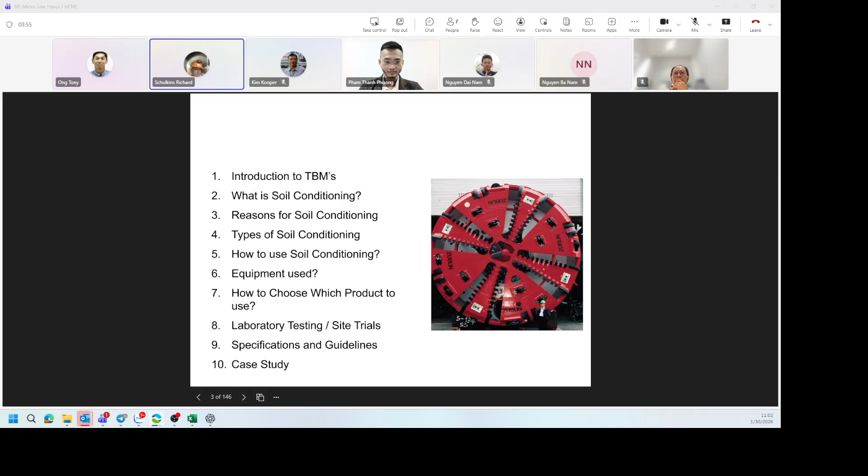From your emails, I hope this doesn't sound insulting, it's not meant to, but it sounded like you didn't really have a very good idea of the difference between EPB and slurry machines. I just know a little bit, but I'd like to hear more. I know that in Vietnam there's only ever been EPBs to my knowledge, I've never known any slurry machines. There may have been slurry machines used for pipe jacking, but I'm not aware of them.

So there are lots of different types of tunnel boring machines. Earth pressure balance machines, everyone calls them EPBMs. You've got open face machines where the front isn't pressurized at all. And you've got slurry machines where you use a bentonite slurry to create pressure on the front of the machine.

Excuse me, Mr. Schulkins, I just want to— Certainly, your presentation. Don't call me Mr. Schulkins, don't call me Mr. Schulkins, just call me Richard. Drop the Mister, I'm not that formal.

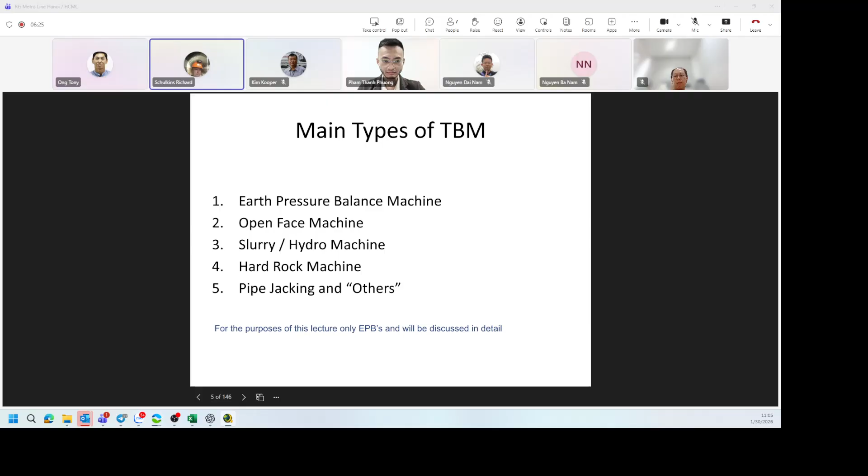Hard rock machines, where you can either have hard rock machines with no face pressure, or hard rock machines that have face pressure. And the truth is, with all of these machines, you have combinations you can make as well. So even though I've listed 5 types of TBMs there, you can mix and match between all 5 of those to make different kinds of tunnel boring machines, but that's basically it for now.

Tell me, what do you see? Do you see just a small frame, or a big picture? Because I pushed a button and it makes it seem quite small. Do you see this presentation on a big screen or not? I'm seeing the big screen. A brief introduction to EPB machines. Oh, you see a big screen, okay, only the words, no picture, no photos, okay.

Can you see a video that I just put up? Can you see the video? No, I'm just seeing a short video. Okay, stop, only that. Oh, it's ended. You have to be patient with me, sorry.

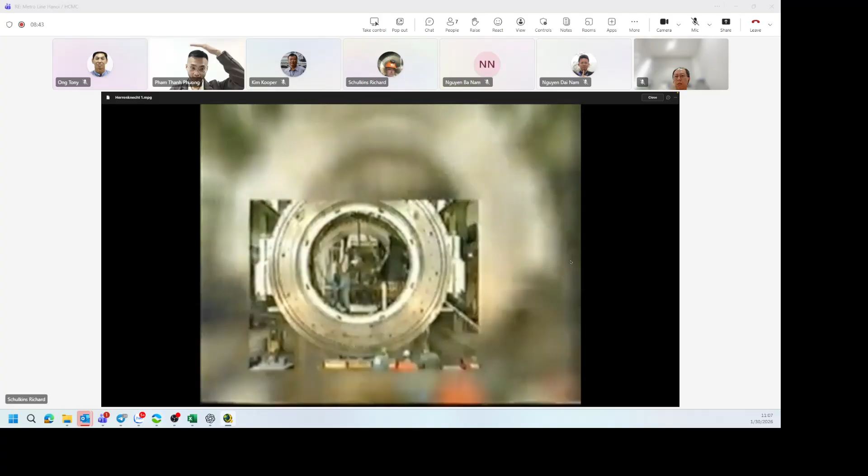Herrenknecht AG specializes in highly complex tunneling projects made to customer specification. Therefore, the machine is specifically designed and manufactured to cope with the prevailing geological and hydrological conditions. This ensures maximum efficiency, environmental compatibility, and safety when the tunneling project is on its way.

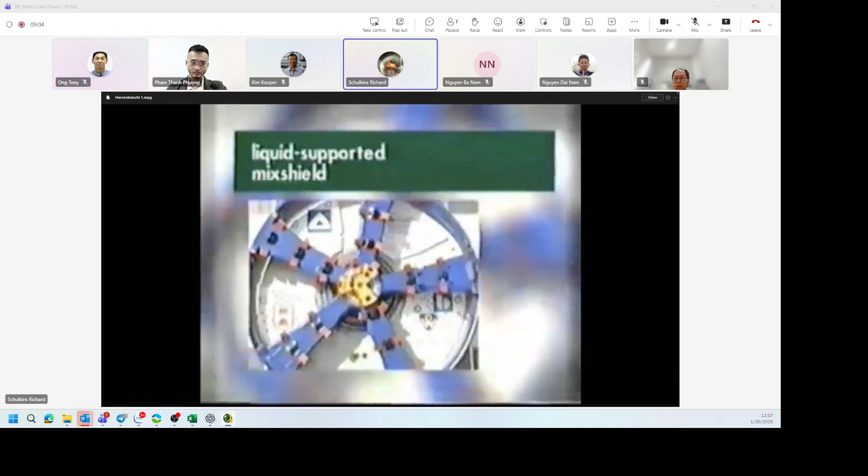Our film shows the structure of two of the most important types of machines made by Herrenknecht AG and how they work. The liquid-supported Mixshield offers the best solution for successful tunneling in loose soils of all kinds and in heterogeneous geological conditions and cohesive formations. Even high groundwater levels can be safely handled using this method. The EPB shield is the first choice in homogeneous cohesive soils.

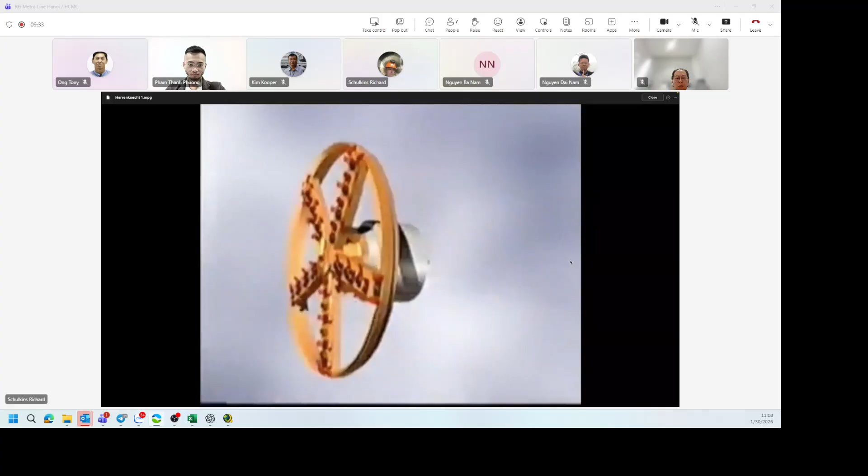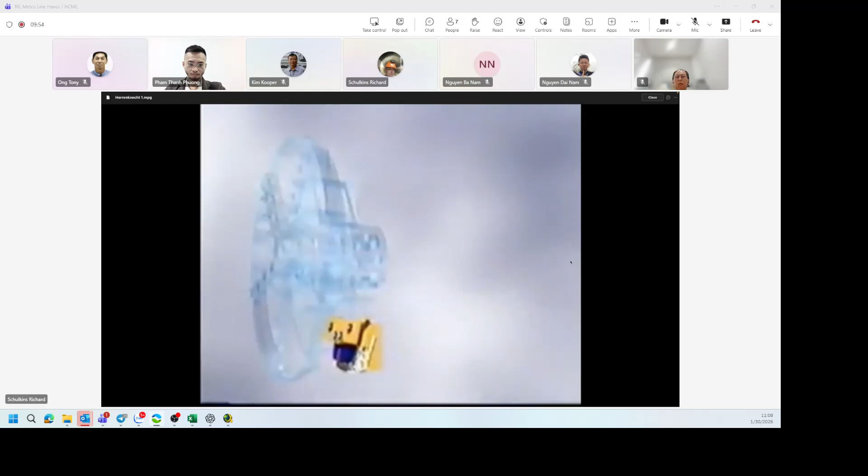The liquid-supported Mixshield, shown here, consists of a cutting wheel with a center-free ring drive and special tool arrangement, the excavation chamber, the submerged wall, open at the bottom, the pressure wall, and the face support plates. The stone crusher. The feed line for bentonite, the slurry line for soil bentonite mixture, and the compressed air line.

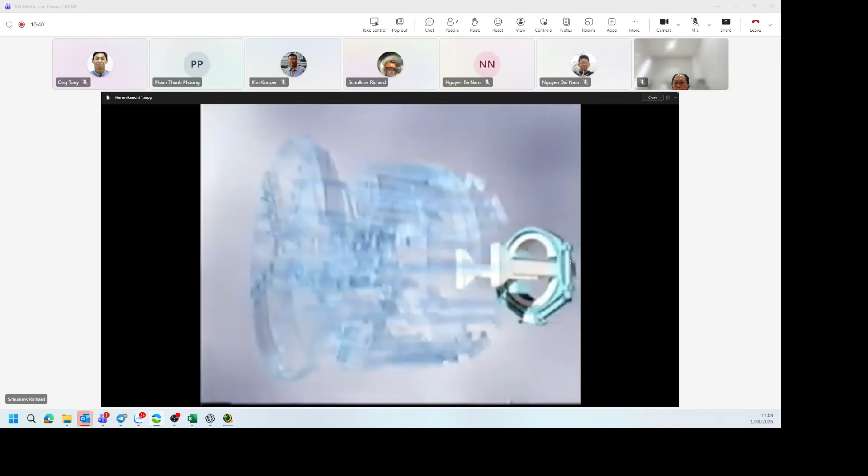The thrust cylinders to provide the thrust force, colored yellow, cylinders for the axial displacement of the cutting wheel for changing tools, colored green, as well as articulation cylinders for driving curves. Compressed air locks for access to the excavation chamber. And the erector for installing the segmental lining.

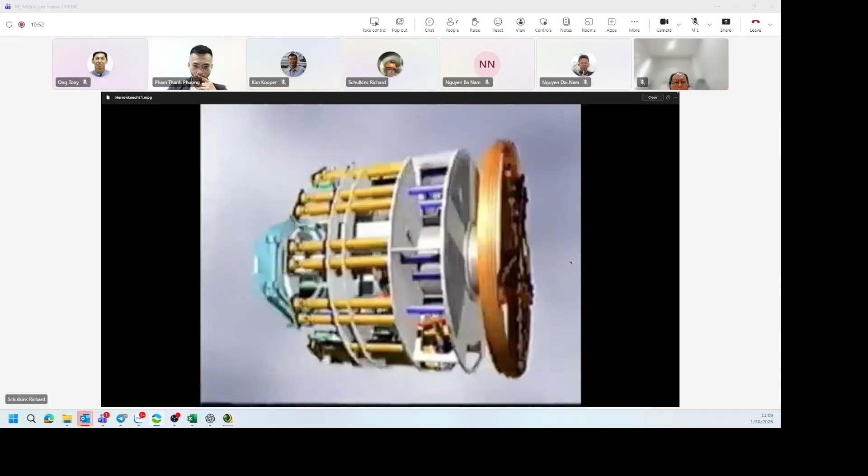All the jobs, from excavating the soil to installing the lining, are carried out under the protection of the shield.

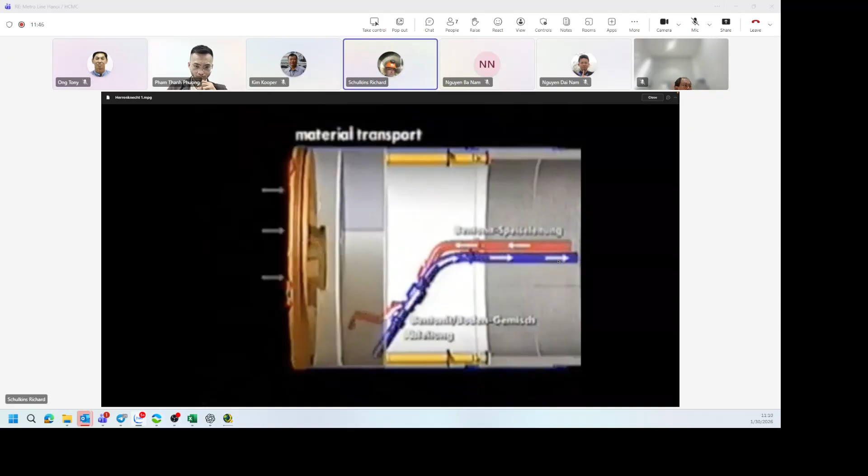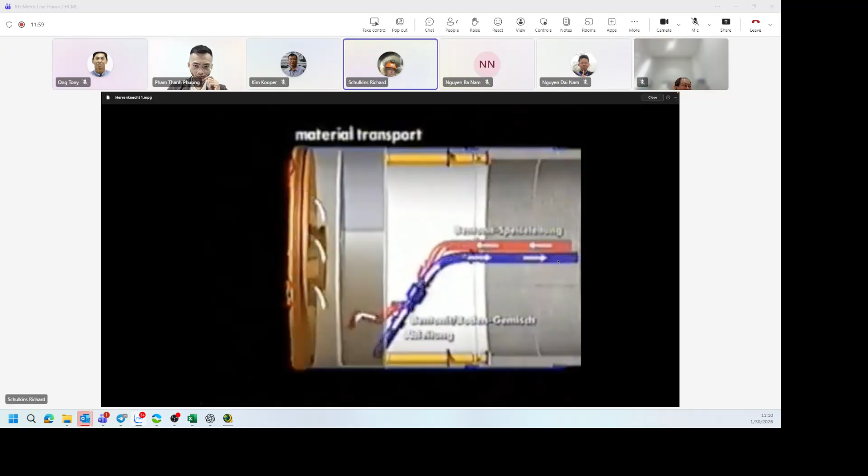In the case of the liquid-supported mix shield, a bentonite suspension acts as a supporting and transporting medium. The suspension is fed into the annulus behind the excavation chamber via a feed line. Here, a mixture of the bentonite suspension and the excavated soil is created, which is pumped into a separation plant via a slurry line. There, the bentonite is recovered and can be immediately pumped back to the excavation chamber.

The stability of the face is ensured by a filter cake placed ahead of it, formed by the bentonite suspension under slight overpressure. A compressed air chamber behind the submerged wall makes it possible to precisely regulate the pressure and thus guarantees the stability of the face even under difficult conditions.

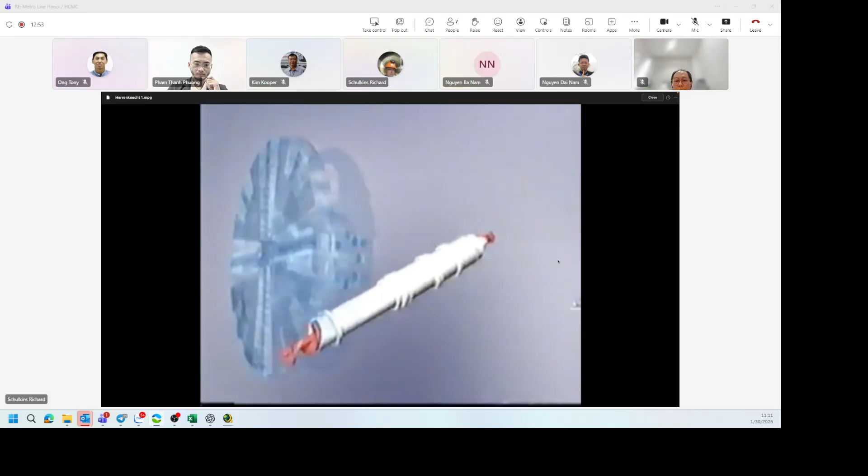An EPB shield consists of the widely closed cutting wheel with special tool arrangement and a center-free ring drive. A pressure wall with stators which form the excavation chamber together with the cutting wheel. A screw conveyor and a conveyor belt to transport muck.

Thrust cylinders and articulation cylinders for inclining the tail skin when driving curves. A compressed airlock. And the erector.

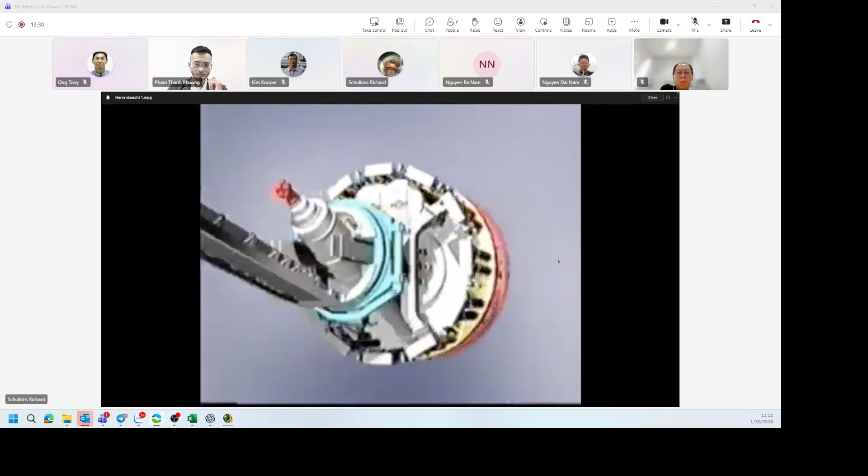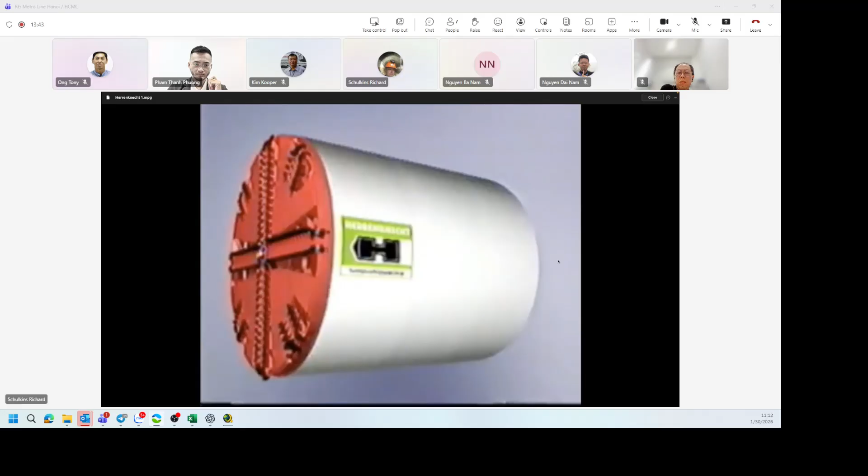In contrast to the bentonite shield, in the case of the EPB shield, the excavated soil itself acts as a supporting medium. To be able to fulfill this function, it must first be turned into a plastified consistency. Depending on the local conditions, this is done by the controlled injection of conditioning agents, such as foam. This makes it possible to reduce the drive torque and cut down wear at the same time. The foam is injected into the soil ahead, via nozzles installed on the cutting wheel.

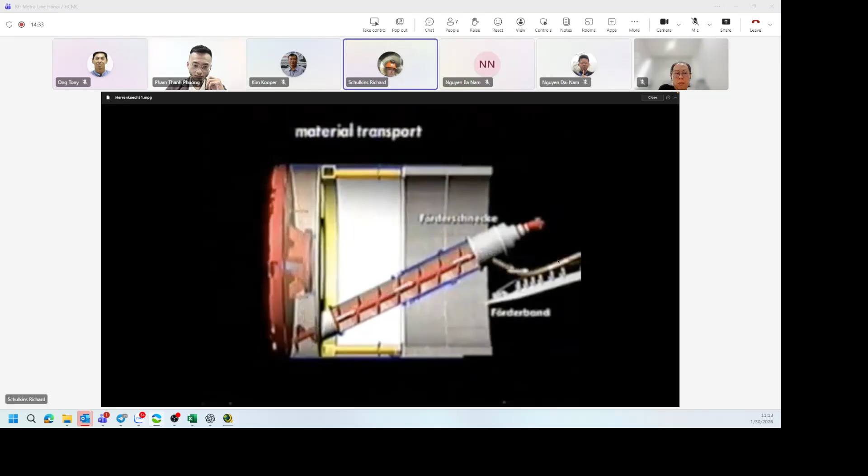Once the soil has been prepared in this way, it is no problem to transport it from the excavation chamber via a screw conveyor onto a conveyor belt. From here, it will be further transported via rail or lorry.

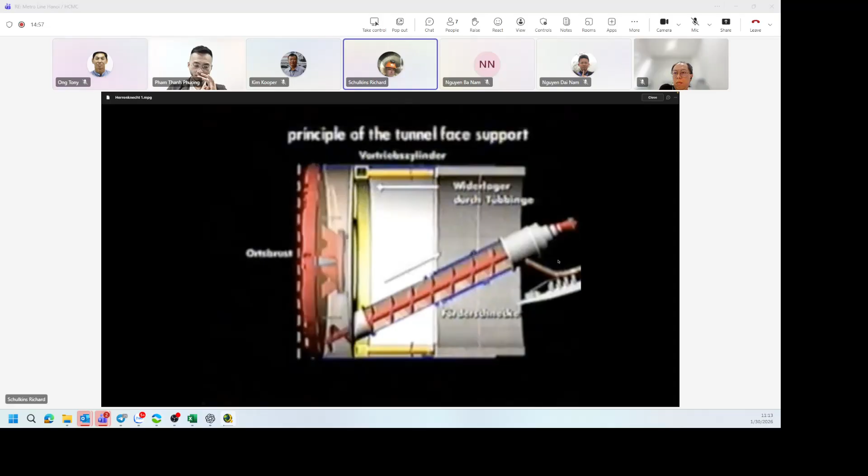In the case of the EPB shield, the pressure for supporting the face is controlled by the coordinated control of advancement speed and the screw speed. The excavation chamber will be filled to ensure adequate support of the face at all times and to be able to react correspondingly to pressures from the earth or groundwater.

Sorry, I'm having a little trouble.

Okay, so that's the basics of a slurry and EPB machine. Let's get back to the presentation.

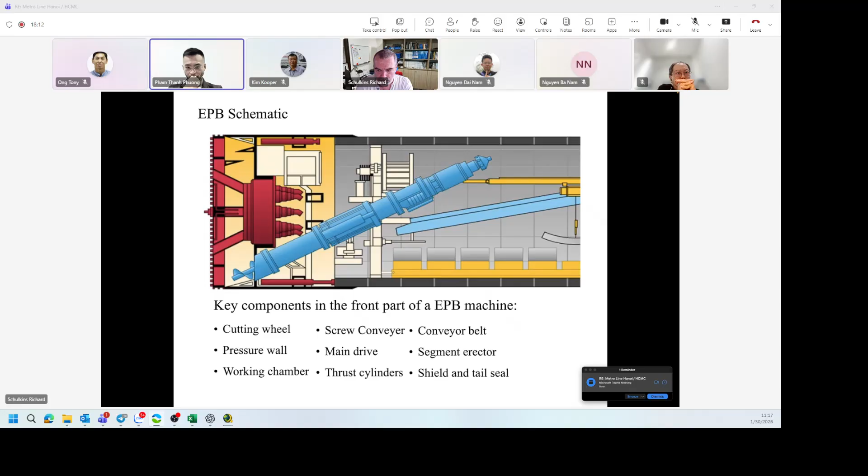Does that make sense? Yep. I know it does to you, Kooper. Oh no, it wasn't you who said that, sorry. Same.

So what you're trying to do is balance the pressure in the front of the machine. You've got hydrostatic or water pressure, and you've also got the weight of the soil. So if you're talking about the project you referenced, in Hanoi, where the stuff came up from the bottom to the surface.

So you've not just got hydrostatic water pressure, you've got earth pressure as well. So, how deep was that tunnel? What was the depth of it? We'll just make an assumption. Assume it was 30 meters deep.

30 meters. Normally the water table, I'd imagine in Vietnam, is quite high. So you've got 30 meters of water, which is 3 bars. You've also got soil pressure, the weight of the soil, so it might be more than 3 bars. The face pressure you need to employ is probably something like 3.5 to 4 bars.

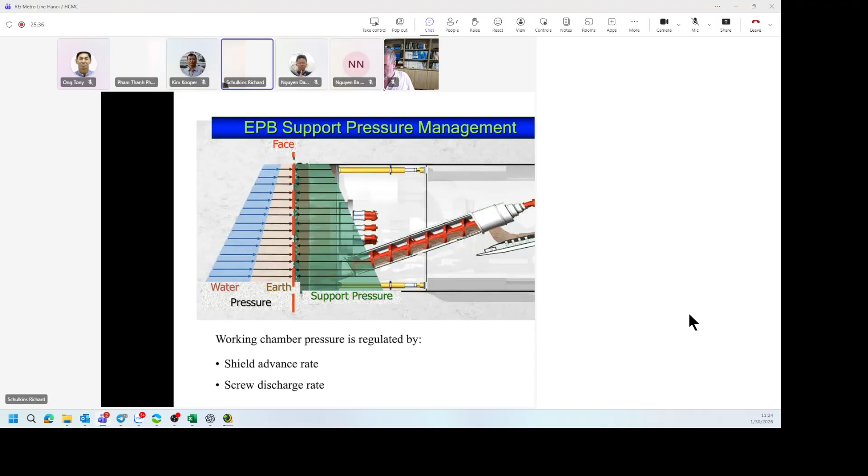Too much too soon, perhaps, but yes, sometimes they use bentonite or maintain face pressure, but we're only talking about a few buckets, not meters cubed of bentonite. Don't know if that makes sense, it's a tricky concept.

Forget about bentonite, we're only talking about EPBs. So when we're injecting foam or polymer into the front of the tunnel boring machine, into the cutter head face through the ports where the foam was blowing out on the video, you're trying to turn the soil from being dry and immovable into some kind of plastic material that's very movable.

Like that, you can create a paste at the bottom of the screw conveyor, and the screw conveyor can remove that paste easily. If it's dry soil, you're not able to remove it with a screw conveyor because it'll all hang up above the screw conveyor, it won't come out, it will just stick there. So you have to make the soil into a plastic movable mass. Does that make sense? Yep.

Cool. Same, different.

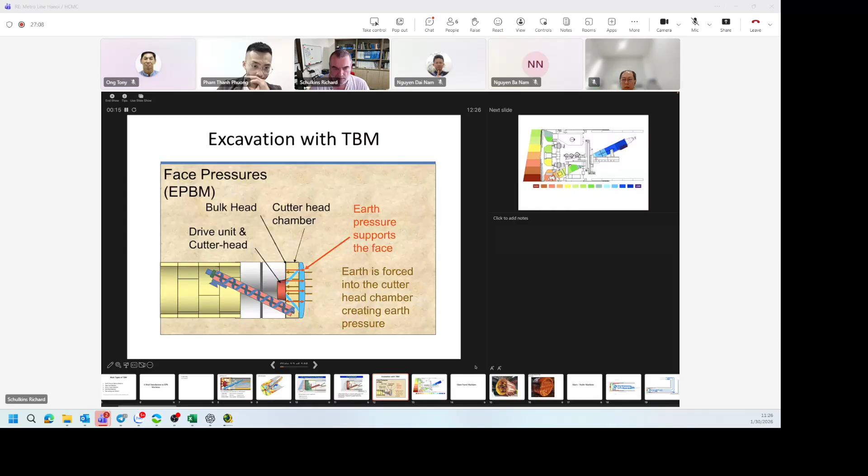The size of your tunnel boring machine is probably, you said, 5.5 meters internal. But when you're setting the face pressure, you have to remember that the pressure at the top of the TBM is going to be different to the pressure at the bottom of the tunnel boring machine. So when you consider your face pressure, typically you need to consider a face pressure that you'd experience a third down from the top of the tunnel boring machine.

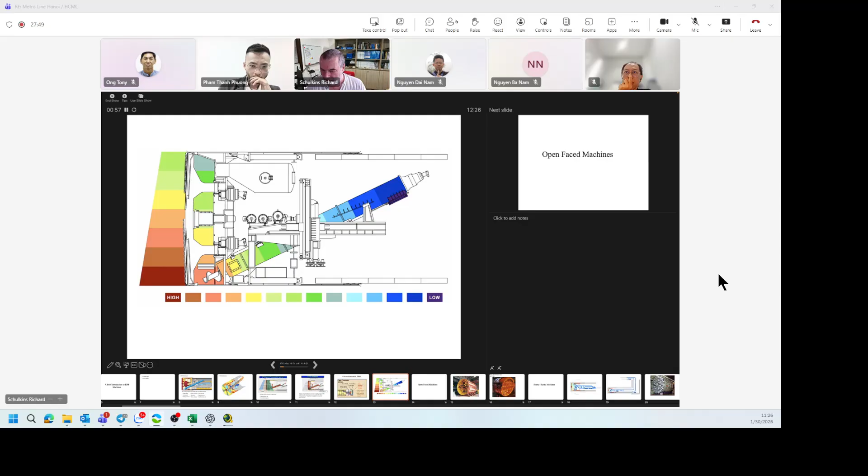Another type of closed face machine, those slurry hydro machines. Instead of injecting foam and polymer into the front of the tunnel boring machine, you're injecting bentonite slurry into the chamber. The bentonite slurry is injected into the front, the soil comes through, the bentonite suspends the solids coming through the front of the machine, and they're pumped out through the extraction line. So completely different philosophy: on an EPB, you only have soil and foam in the front of the machine; on a slurry machine, you have bentonite slurry removing the particles. So on a slurry machine, you don't have that screw conveyor, you just have this sequence of piping that's able to remove the slurry.

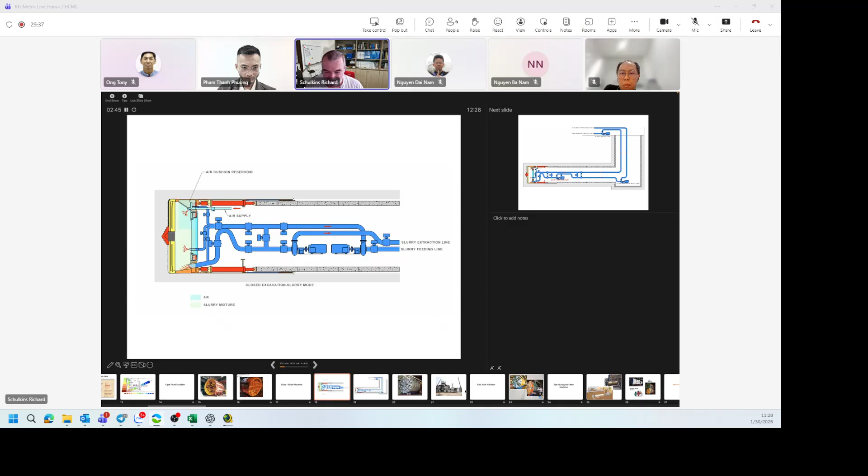MAPE can do both, we're able to handle both, and we have done both on many different projects. But there's not an awful lot of point in talking too much about slurry machines today because it's not something I think you'll encounter, though I'm happy to talk to you about it separately just for education purposes only, if you like.

The theory is you've got your tunnel boring machine, you pump the bentonite slurry into the machine, the clean bentonite, and you extract the dirty bentonite. That's typical of a slurry machine. On the surface, you have the slurry treatment plant, it's fucking big. So a lot of people think slurry machines are easier, but you have to have a lot of space on the surface to install this plant to clean the slurry. This plant cleans the slurry and you send the clean slurry back down to start again, so it's a cycle: clean bentonite in, dirty bentonite out.

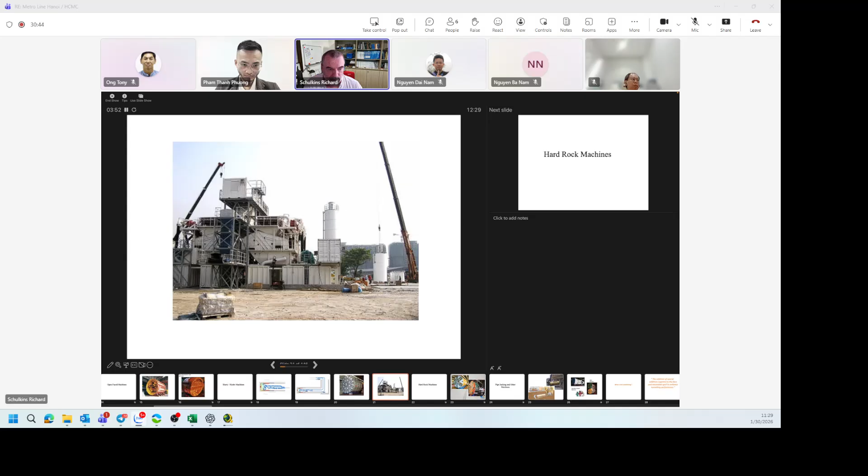In here you've got things like hydrocyclones and sieves and all sorts of stuff to clean out the slurry. You've got, what else have you got? All sorts of stuff anyway.

So in this case, can we use foam instead of bentonite, or must we use bentonite? I'll make the point one more time very clear: slurry machines use bentonite, EPBs don't. So EPBs only use foam and polymer, slurry machines only bentonite. Oh, only bentonite. Yeah.

There are very strange exceptions, but extremely rare. I don't think in the situation in Vietnam it's likely that there'll be any variation from what I've just said. I think it will be EPB, foam and polymer, slurry machine, bentonite.

Now, there are polymers you can add to the bentonite on a slurry machine that we also supply, but we're not talking about slurry machines today. But I'm hoping that you've already got a good idea about the difference between slurry and EPB machines.

You don't want to be going into a meeting with the client and start talking about bentonite when they've got an EPB, because they'll look at you like you're crazy. Be careful not to talk about bentonite when you're talking about EPB, because honestly, if I were the client, I'd just say, get out. You don't know what you're talking about.

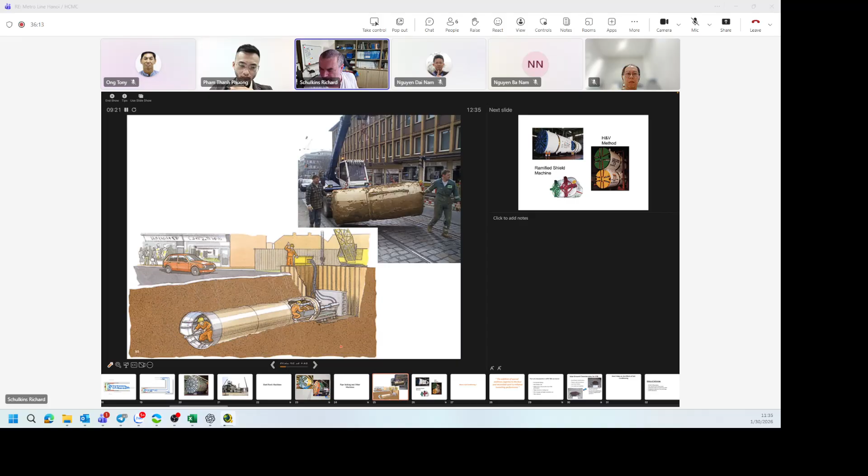So, other types of tunnel boring machines that are very, very strange, you're not going to come across so much. You've got under and over TBMs where they're actually joined together or can be separated and act independently. You have square TBMs, which are a recent innovation. We've had maybe three to four different projects in Singapore where they've used these square TBMs.

They don't so much, you get more square than this. Instead of these cutter faces rotating, they kind of oscillate. So they push in and out on this axis. So when the cutter comes round to here, they can push out further. Okay, not necessary to talk about.

There was one of these in Hong Kong a couple of years ago, where they have a TBM that comes out the side and does cross passages. Again, not going to happen in Vietnam this year. But you can have combinations of everything. You can have slurry machines that convert to EPB machines, and there are other machines called... sorry, I'm screwing with my own head at the minute... where you have continuous excavation, double shield machines. But again, we don't need to talk about those. But if you want to talk about them later, very happy to.

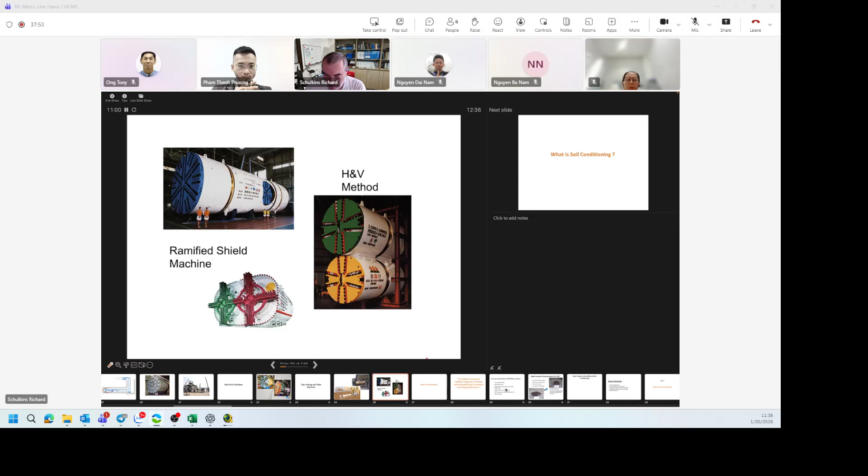So we're only going to talk about EPBs today. We can talk about slurry a little bit if you want. The one thing I could say about slurry machines is where you have the blowout situation that we were talking about in Hanoi - there are things we can do to minimize the chances of blowout on a slurry machine, but we can't do that on an EPB. On a slurry machine, typically the density of the slurry is about 1.2.

But what you can do is you can weight the slurry. You can add things like hematite, iron ore, or calcium carbonate to the slurry, so you can make it heavier. And if the slurry is heavier, you need more force to blow it up to the surface. But on an EPB, that's just not practical or possible.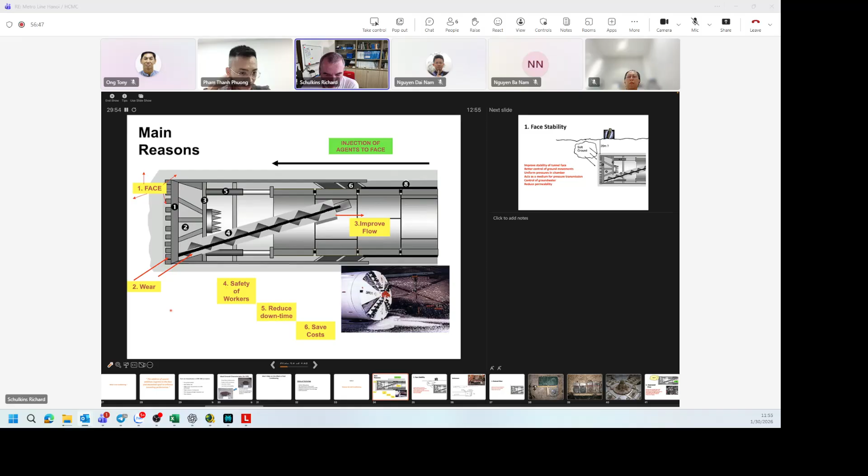So this is just going through it. The other thing I've not mentioned is when you put foam and polymer into the soil and make that plastic paste, the soil also becomes impermeable. With dry soil, water just falls straight through, so you lose water pressure. Inside the chamber there's a path for water everywhere, but when you make the paste with foam and polymer, the soil becomes impermeable, so you're not taking any water from the front of the tunnel boring machine. You're not drawing down the water table, so you're reducing the risk of subsidence.

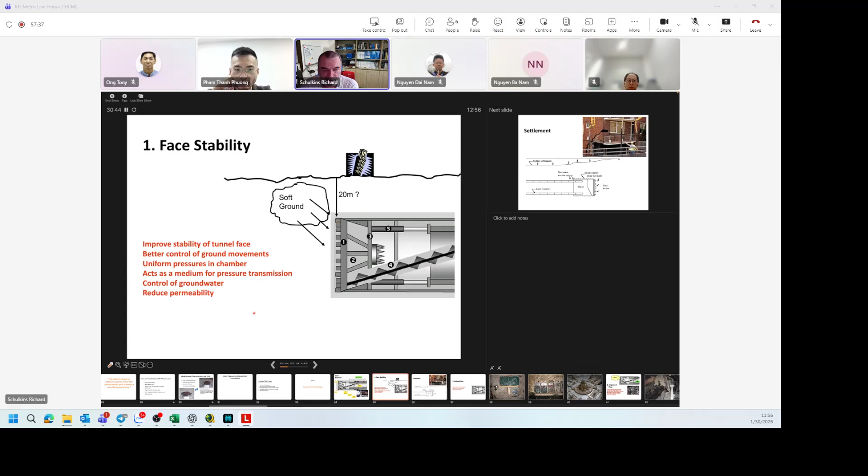The rest we spoke about. The more soil comes through the front of the machine, the more risk you have of settlement. So everything to do with foam and polymer is about only cutting as much as you need to advance the tunnel boring machine. You don't need to cut more than that.

One of the things you often need to consider is that the tunnel boring machine is bigger by some diameter than the outside of the segments. Also, the tunnel boring machine is normally tapered a little bit, so the front of the machine is a little bit bigger than the back of the machine.

Nobody is perfect, and even if you operate a tunnel boring machine with maximum efficiency, you're still going to get something called face loss. You're still going to lose about 3% — you're going to get 3% additional excavation. So you're almost always going to get some kind of surface settlement. The surface settlement can be anything between 0 and 30 millimeters if you're operating the machine optimally.

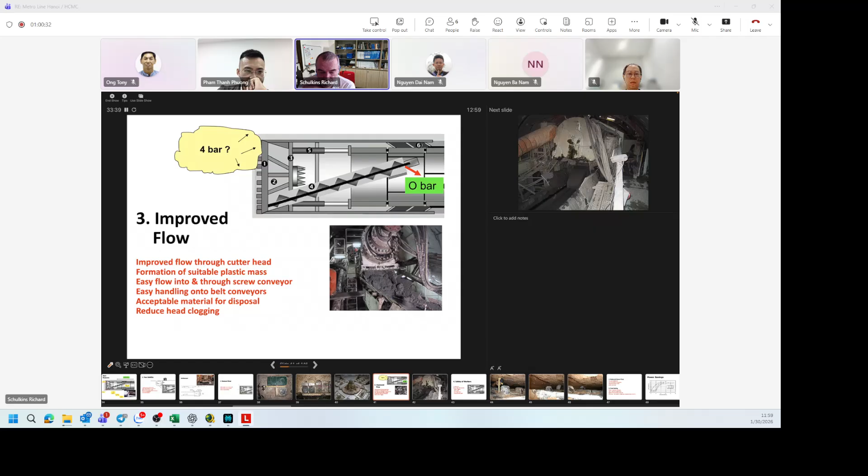Improved flow, we spoke about it. You want the soil to come out like this. You rarely see it as good as that, because that's basically clay and it looks perfect. In that case, it was.

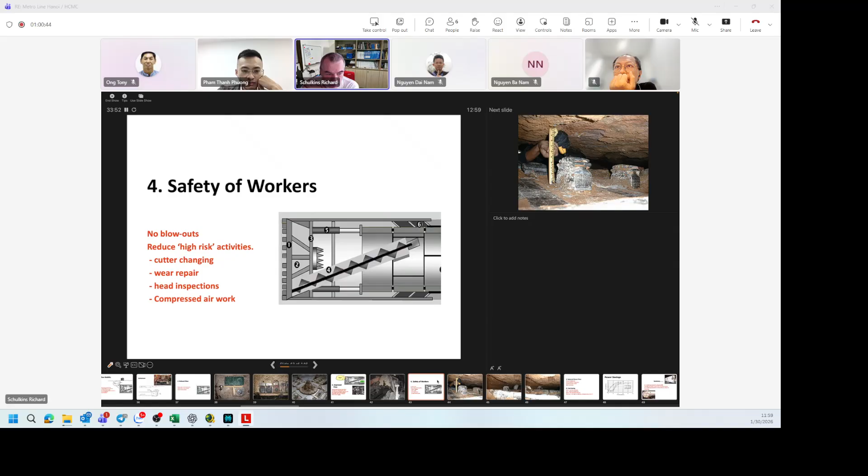We spoke about that — you can pull back the front of the tunnel boring machine, sometimes like 100, 200 millimeters, so you're able to get into the front. This is the face of the tunnel boring machine — sorry, the face of the ground. This is the face of the cutter head. You've got very little room to work in.

And you can see all the soil is dried, caked on. These things weigh 30 kilograms plus. It's a difficult business. I only show this photograph because it amuses me — because as bad as it was, I still found an Indian guy asleep on his shift in the front of the cutter head.

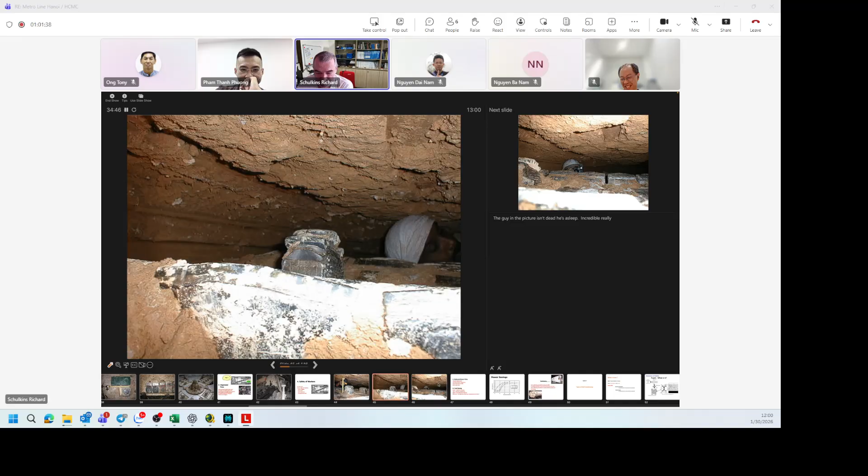I don't know how he slept. It's literally impossible for me to sleep there, but there he was. It looks a little bit dangerous, right? I'm really afraid the soil will collapse and you'd be buried alive.

Well, that and there are all sorts of horror stories on tunnel boring machines. Sometimes people forget people are in the front of the machine and they turn it on. Can you imagine being in the front of a tunnel boring machine and they start it turning? My goodness, this happened too many times.

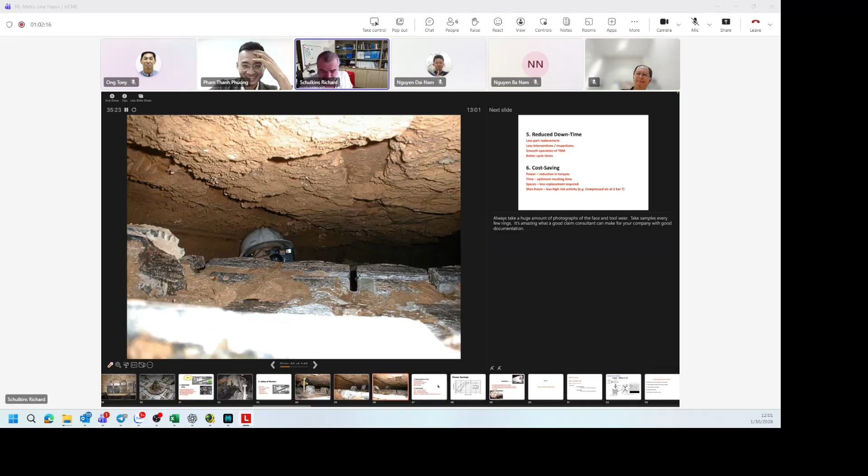Reduced downtime, smooth operation, better cycle times, reduction in torque - that's the power you need to turn the cutter face. If you can reduce the torque, you reduce the power that's required. It's something not many people consider - the power saving you can get from ground conditioning. You can pay for the ground conditioning just from the electricity you save.

Because you're never going to find a contractor that says, okay, we'll go for 10 rings without any ground conditioning, and then we'll add ground conditioning and see what the improvement in torque is.

It doesn't really need a test report - it's kind of obvious. If you're trying to move a soil that's not plastic and unmovable, the force you need is much, much more than to move a plastic soil.

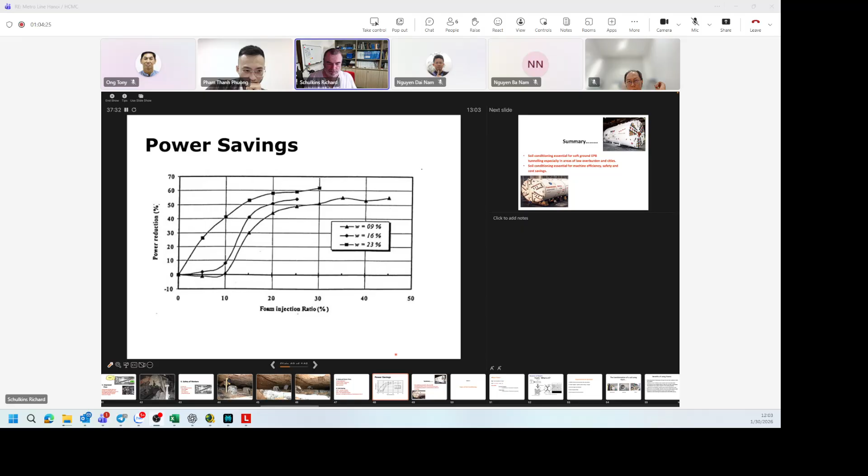Yeah. Going to go quickly back.

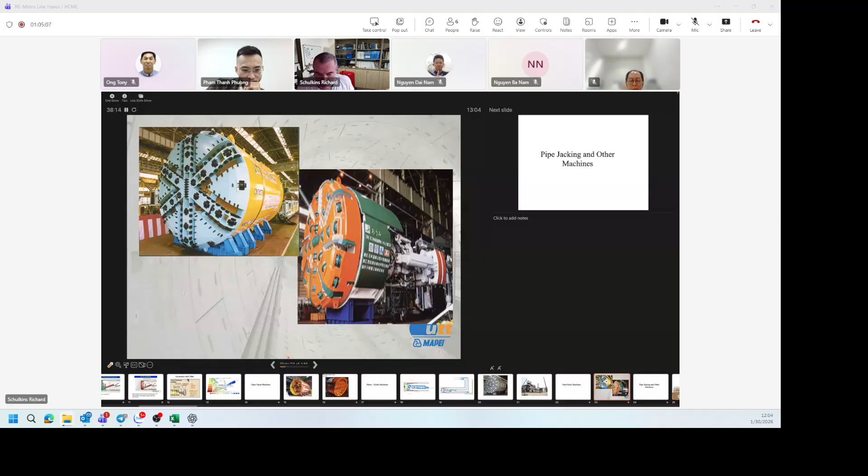On the front of hard rock machines, you can see these round cutters - they're called roller cutters. On a soft ground machine, you have these rippers and scrapers. The cutoff is about 15 MPa, like I said before. You can always tell from the machine supplier whether the ground is hard or soft depending on what cutters they install on the front of the machine.

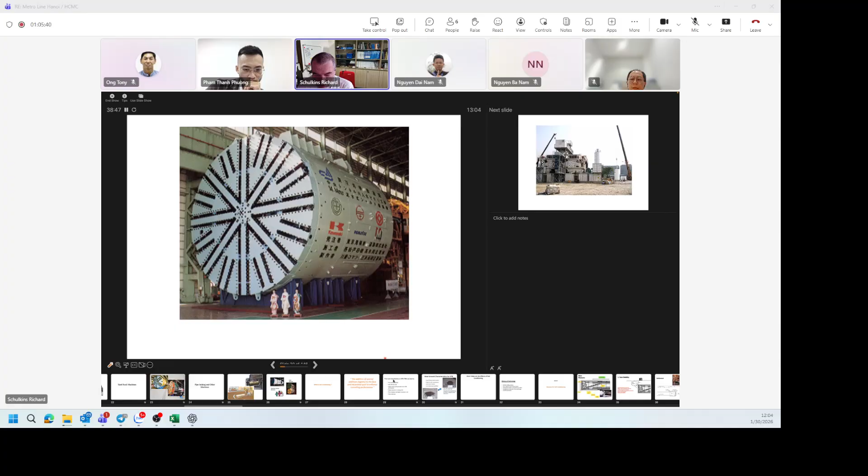So roller cutters you always put on hard ground, and rippers and scrapers - when I say rippers and scrapers, that's a ripper, and you see these on the sides of the openings, they're scrapers. So anything below 15 MPa, you probably see this configuration.

You can't switch them about too much, because if you use a roller cutter in soft ground, they don't rotate, so they just wear away and don't cut any ground. And if you use rippers and scrapers in hard rock, they're just going to wear away after about 5 meters. It's not really so important, but it is something useful just for your knowledge.

This one needs updating a bit, I must admit. Foam is foam, and we all know what it's like. What you really want to generate when you have your ground conditioning on your tunnel boring machine is a foam that looks like shaving foam. The smaller the bubbles, the better - they're stiffer, they're stronger.

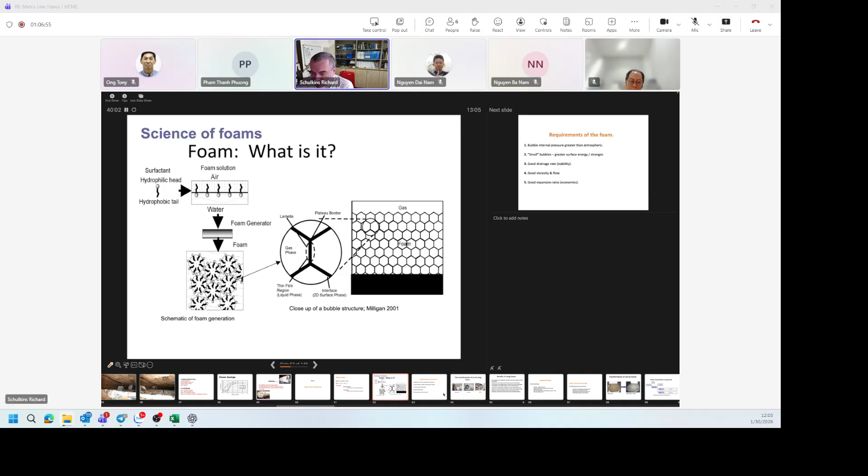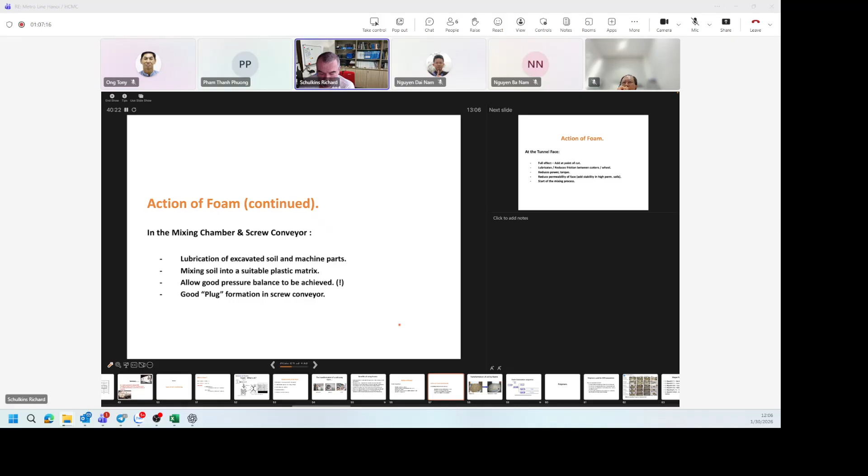Oh, we've spoken about that. Spoken about that. Never mind about that.

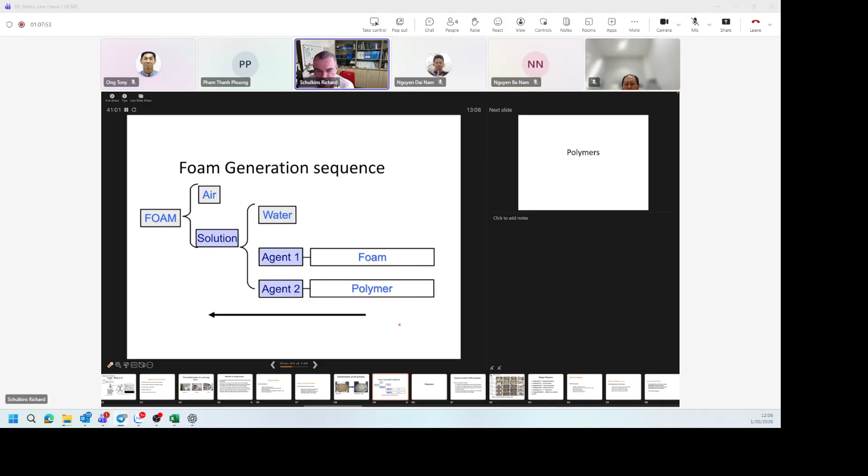So, okay, we'll come to this bit later, but on the tunnel boring machine, you put in our IBC of foam and you add water to it, then you add air to it. And sometimes you add a polymer also. You can inject the polymer through the foam lines, or you can inject it separately. There are all sorts of rules that make that different in different cases.

Polymers are different. Polymers have different actions. You can have polymers to increase the viscosity of the soil. You can have polymers to decrease friction. You can have polymers to dissolve clay.

All of these need to be considered based on the soil characteristics, which I'm hoping over the next few weeks you'll be able to get some soil from the project and send it to Singapore. What I also need is what they call different things in different countries, but in Singapore, for example, they call it the Geotechnical Interpretive Baseline Report. They give you this longitudinal profile of the soil and conditions throughout the tunnel. With that and a soil sample, I'll be able to generate a report that you can take to the client, or the customer, and they'll be able to give a rough estimate of, one, how much they need to use, and two, answers to any specific problems they might have. I don't know if that's something you can get for me over the next few weeks.

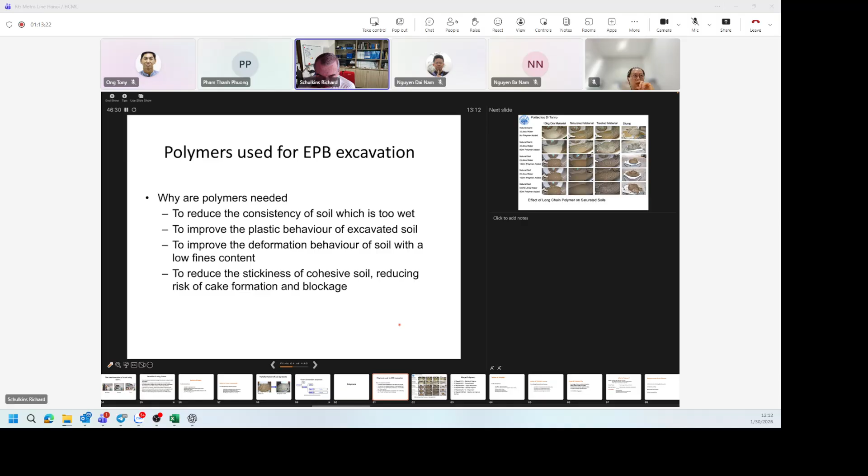It also lubricates, and it also stops clay from being sticky. It has an ionic action on the surface of the clay particles and prevents clay from becoming sticky, which is also very useful on an earth pressure balance machine, because you want to prevent any kind of adhesion to the cutter face, to the cutter teeth, and it helps a lot when you're taking the soil out from the screw conveyor into the skip.

So, for example, we sell a lot of Mapedrill SA1 in Thailand because they have a lot of sticky soil, and also they have a lot of water-heavy soil where we're able to control the water by using this polymer.

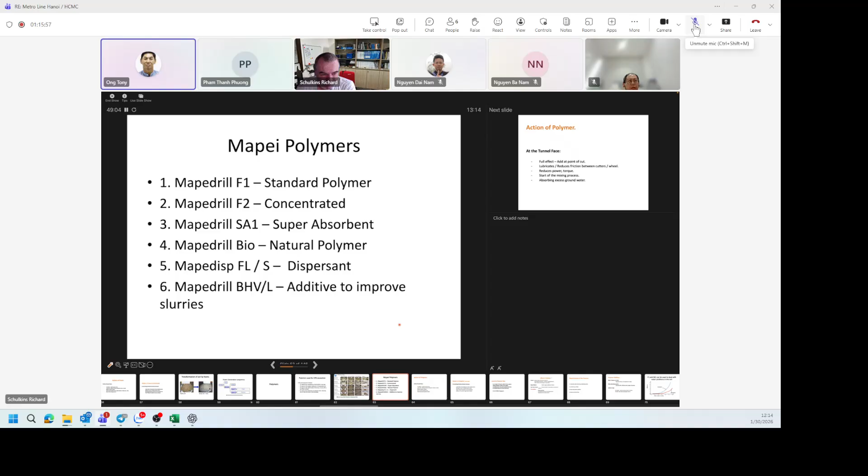Other than the fact that you don't have ISO yet. Is there any word on that, Tony? Are you getting your ISO certification or not? No, Richard, just yeah, we got the ISO certification. We got the ISO 14001. Yeah, 20 years too late, but well done. Okay, thanks, Richard. It's not important. Important.

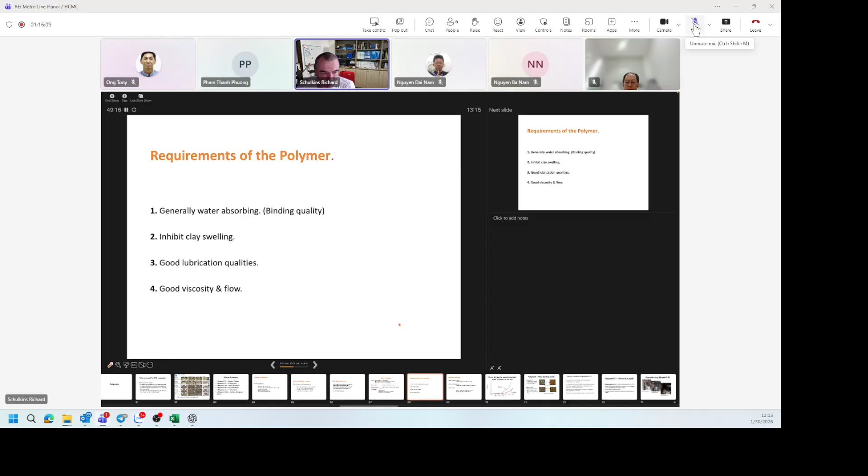Lots of different types of polymers, depending on case by case. Spoke about that.

Sorry, I don't know if you can see the spinning wheel of death. I've got to wait for it.

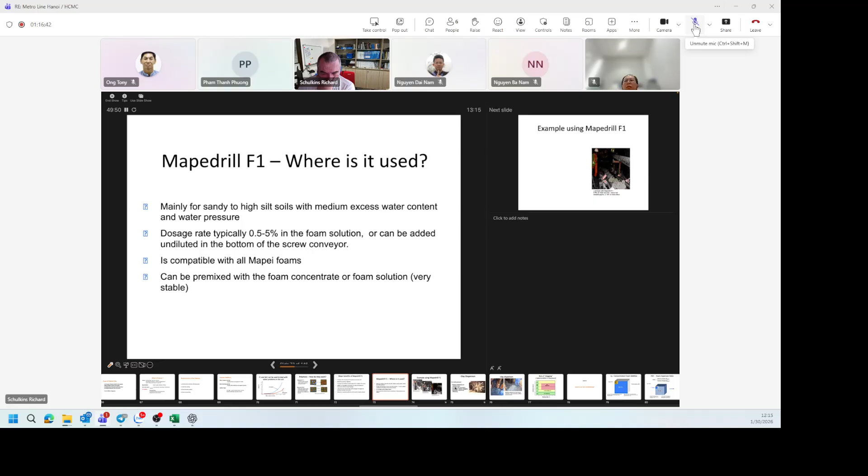Sometimes people want to use a dispersant polymer just to clean the cutter face before they do an intervention. Before they go into the cutter head, they can put dispersants into the front of the machine, so it makes it easier to clean and do the cutter head changes.

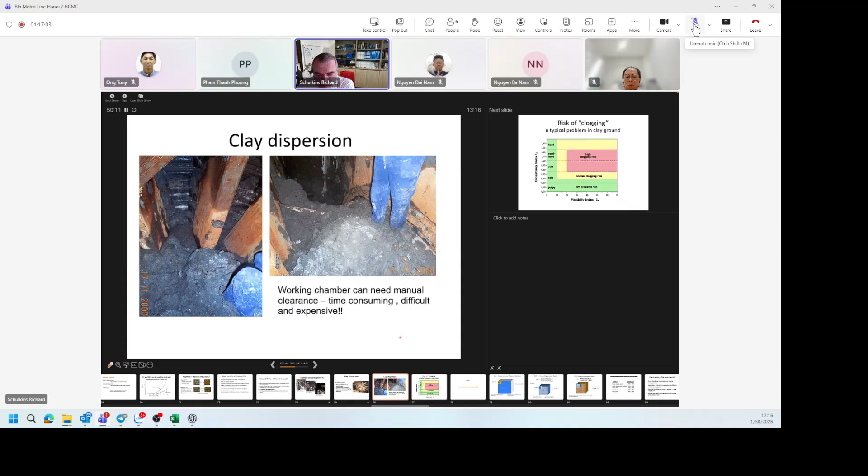This is a very simplified version of a graph that was produced by a guy in Germany, and it's just a simple concept, but a concept that you might need to understand a little bit. I don't know if any of you remember from university when you did Atterberg limits.

So, for example, when you have a dry soil, you add water. It's kind of very, very stiff, and then you get to the plastic limit where it's movable, and then you get to the liquid limit where it flows as a liquid. These are called Atterberg limits, if you're not familiar. This is all on the Geotechnical Interpretive Baseline Report, which is kind of interesting.

A lot of soil, if you add a little bit of water, it's not so sticky. And then you get this zone of how much water you add to your soil, where the soil becomes extremely, extremely sticky, and then you get to the point where it's so wet it stops being sticky again. There's a much more complicated version than this that I could spend an hour describing to you at a later time if you're interested.

Okay, I don't know how much you know about where you use clay, foam and why. But typically you use foam at say 2 to 3% concentration. So you put your IBC on the tunnel boring machine and you go to the driver's cabin on the TBM and you say how much you want this foam diluting. There's a screen on the tunnel boring machine where you can set all of these parameters.

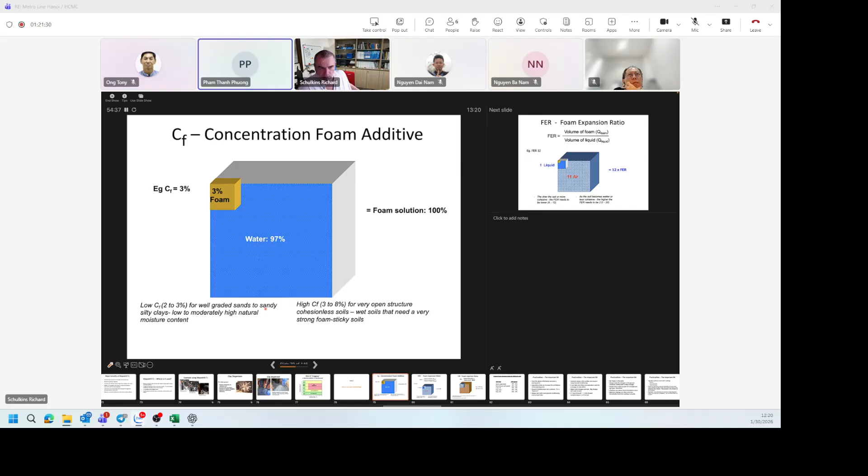All of our foams have got the same density as water. So anyway, you add the water, and then you add the air.

Adding the air is one of the stranger things on a tunnel boring machine. Of course you need to add air, otherwise it's not foam, but it's the one thing you shouldn't really mess around with. Don't adjust the air - set it at say 10 or 12 and leave it, because if you adjust the FER, you're making a huge change to the amount of fluid being injected into the front of the tunnel boring machine. If you change the FER by, let's say, 1, you're adjusting what's being injected by 10%. It's a big gap - too much. So always remember not to change the air. Leave the air setting.

The rule of thumb is that if you have dry soil, you need wet foam, and for wet foam you don't need much air. If you have dry foam, you need a lot of air, and if you've got wet soil, you can have dry foam. So this is how you think about the adjustment of the FER, but only do that at the beginning. Don't change it unless you have to.

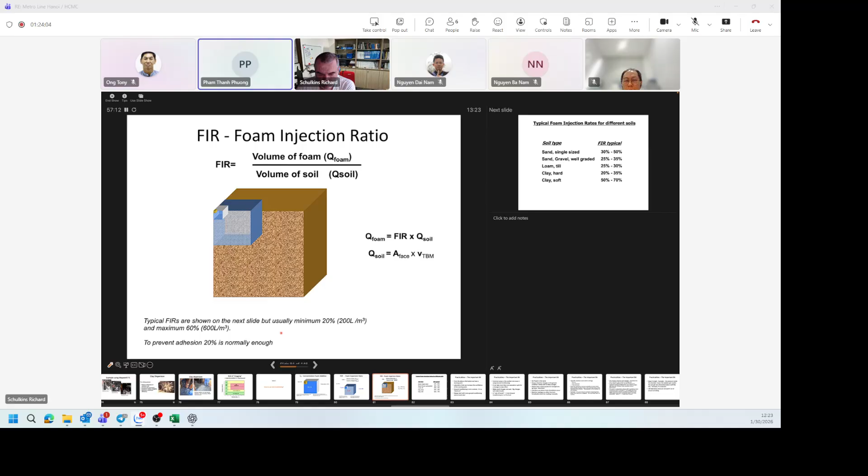20% is quite often not enough - sometimes you have to add more. Just a couple of typical values. I remember I've attached this presentation, so it's something you wanted to go through.

So from everything I've said before, you've got some sort of basic idea of what foam is. If you send the stuff to the laboratory, you can increase the confidence of what I get from your GIBR and longitudinal profile. Quite often, ground conditioning is not really so scientific - it's more about knowing what you're doing than anything else.

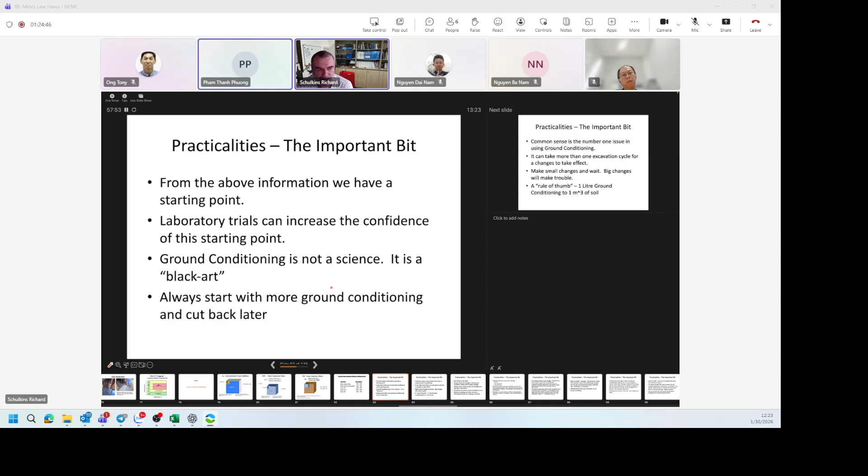Common sense, number one. When you make a change to ground conditioning on the tunnel boring machine, you always have to remember it's going to take probably more than one cycle of excavation before you actually see a change coming out.

I get very frustrated when I go on tunnel boring machines and you can see the driver, the shift engineers, the section engineers and the project manager coming down and adjusting the foam every 20 seconds or something like that - it's absolutely nonsense. They can make a huge fuck up by adjusting it too often. There should be one guy left in charge of the ground conditioning and nobody else should touch it.

Interesting rule of thumb is that in an average tunnel, you need 1 litre of product for every metre cubed of soil. So if you're tendering a project and don't really understand what the ground condition is like, you can start off by just assuming you need 1 litre of Mapei foam for every metre cubed of soil they'll excavate. And if you know the length of the tunnel and the diameter of the TBM, you can get a very good indication of the amount of product they need for the job.

All projects are different. Always put a picture up in the tunnel boring machine showing where the ground is, so they're ready for any changes. Always have additional product on the job site in case they come across any very bad conditions that need immediate action. Where you get changes is where the majority of problems occur, because the interfaces between different soil types is where you normally get high water flows or just a lot of different issues.

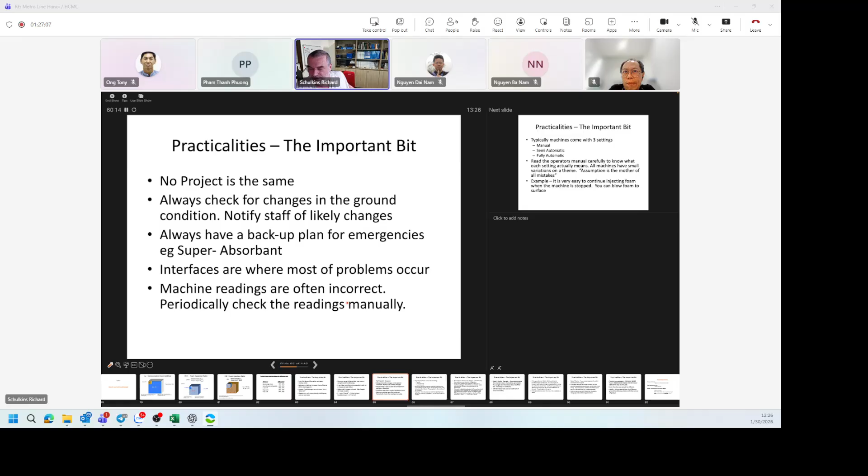The tunnel boring machine's driver control cabin has 3 separate ways to adjust the foam. You have manual, where you can turn on each individual line on the front of the machine separately. So you can test line 1. A typical metro tunnel has 6 or 7 injection ports, and you can turn them all on separately and check each line to make sure they're all working. That's why you need the manual setting.

Semi-automatic is where you set how many liters per minute of foam you want to go through each port. You might say you want 40 liters of foam through each port when you turn the machine on. So as soon as you turn the excavation on, you get 40 liters of foam through each line. You can adjust that - 30, 40, 50 through each different line, and put separate figures for each line, but that's not really the way we'd ever want to go with a tunnel boring machine.

You really need to set it to fully automatic. On fully automatic, you type in the foam injection ratio, the concentration of the foam, and the foam expansion ratio - the 3 things we spoke about earlier. With that, it's able to understand from the speed the TBM is advancing how much foam needs to be injected. It's linked to the speed of the machine.

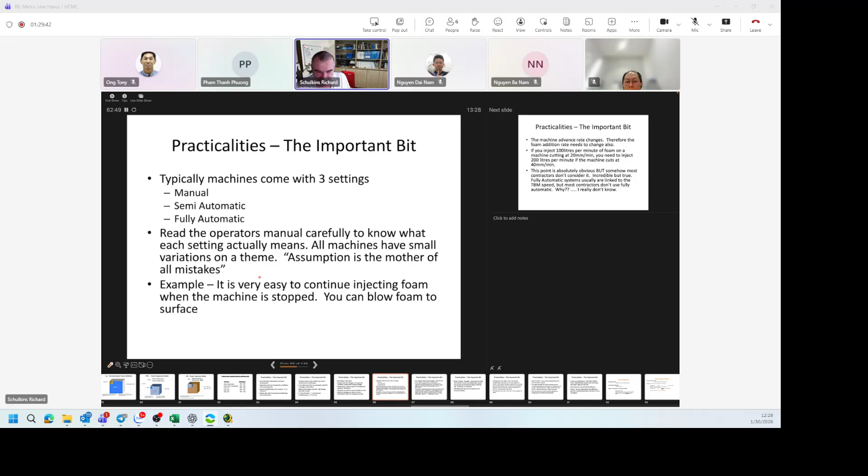For fully automatic - it's a very obvious statement, but I'd still say 6 out of 10 tunnel boring machines don't use fully automatic. That's another thing we can go onto the tunnel boring machine and set up for the guys, and it makes the machine go significantly faster. In my experience, a tunnel boring machine set to fully automatic is typically going to go at least 30% quicker than if you have it on semi-automatic.

It's important to keep everything simple, don't make it too complicated. A lot of people talk about the fact that if you've got high face pressure, you need to inject more air because the size of the bubble gets smaller under compression. Don't go there, too complicated.

Lab tests are good, but they're never as good as actually going onto the tunnel boring machine and using it in anger.

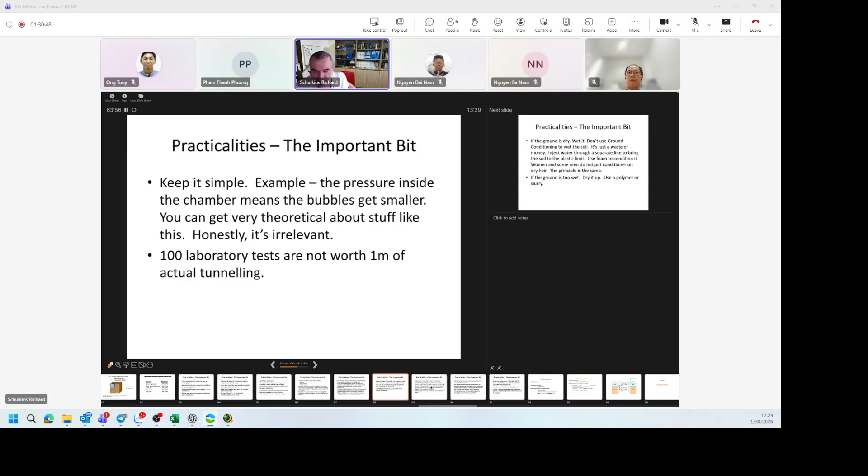Okay, so stupid points, but they're kind of obvious. If the ground's very dry, you don't use foam to make the soil wet. You have to add water through a separate line to make the ground more wet. I use this ridiculous example: when you wash your hair, if you put shampoo on your head without water, you're not going to make any foam. But if you wet your hair first, then you can make a lot of foam. It's the same with soil. Otherwise you're just going to use the ground conditioning to make the soil wet.

It's great for MAPEI, it means we can sell more foam, but practically it's stupid. You need to add enough water. If you remember the Atterberg limits I spoke about earlier, you need to add enough water to bring the soil up to its plastic limit, and then use the foam to lubricate the soil at the plastic limit.

Are we talking about the same conditioner? The conditioner for hairstyle is the same conditioner we're talking about here? Same chemical? No, we're just talking about foam in general, it's different. I don't know if it's very different, but it's certainly different. It's just an example. Richard tried to give us the image to imagine, easy to understand. But Richard, your example is very interesting - for me, I never put conditioner when I wash my hair. Yeah, but it'd be very interesting if, when we start using our foam on the TBM, you take a small bottle and wash your hair with it for 1 year. Let's see what happens.

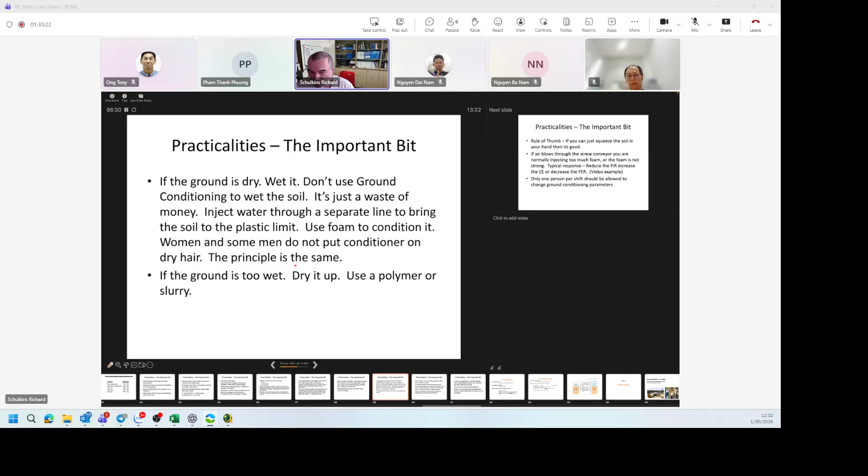So if the ground's too wet, dry it up - use a polymer like Mapegel M1 to suck the water and make it more dry. So the rule of thumb... you can't see my video, can you?

What am I doing? Sorry.

If you can squeeze the soil in your hand and you get soil squeezing out through your fingers, that's the condition you want. That test is better than 100 laboratory tests - it's very visual, very hands-on. If you can't squeeze it out of your hand, it's too dry for the tunnel boring machine. If it falls out of your hand, it's too wet. But if you can just squeeze the soil in your hand, then you've got the correct amount of water and foam.

I guess this is going into too much information, but these are things that become more obvious if you've worked on a tunnel boring machine before. If air blows through the screw conveyor - because if you're adding too much FER, foam expansion ratio, you quite often get air escaping from the foam and creating a void in the top of the tunnel boring machine. When you rotate the cutter head, that void of air gets brought down to the screw conveyor and fires through as blasts of air. If you get that, the soil's too dry - you need to make it wet. But that's something you'll come across.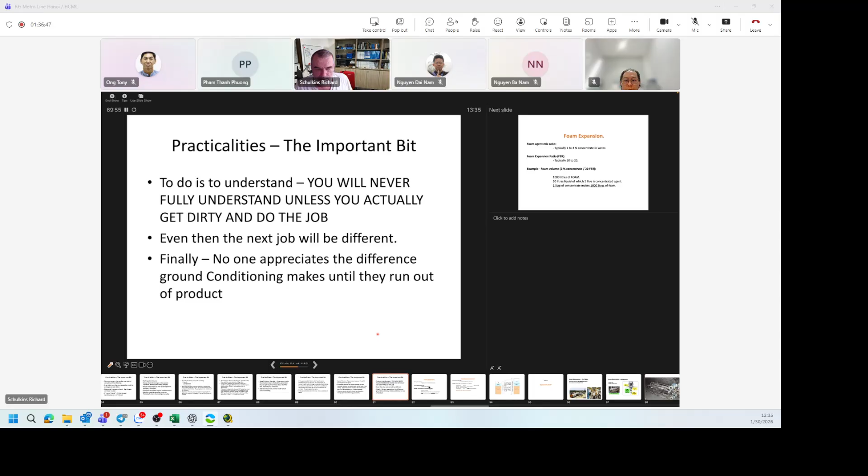I'm not going to make you do any math problems - don't worry about them.

This is obviously when you put foam into a soil, then the volume becomes bigger, so the density changes. Every tunnel boring machine also has a density weigher on the belt conveyor, so you need to understand what the density of the soil is so it can accurately calculate the volume for excavation management. You don't want to excavate too much - too much excavation, you get settlement.

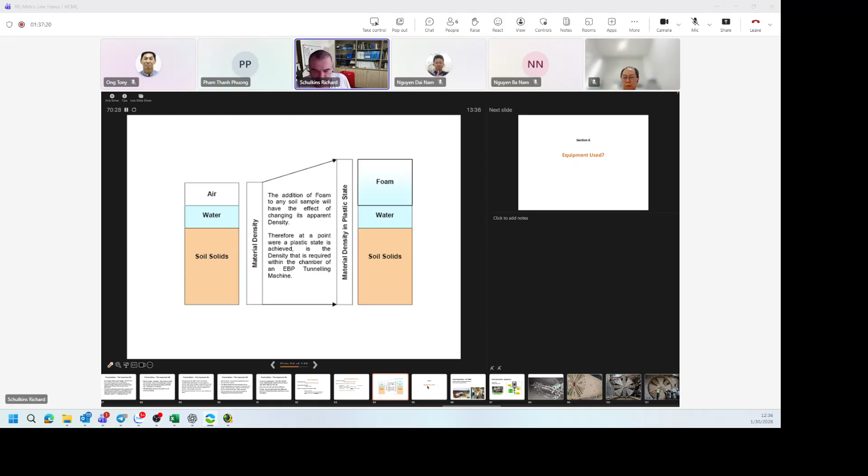Equipment used: TBM and backup.

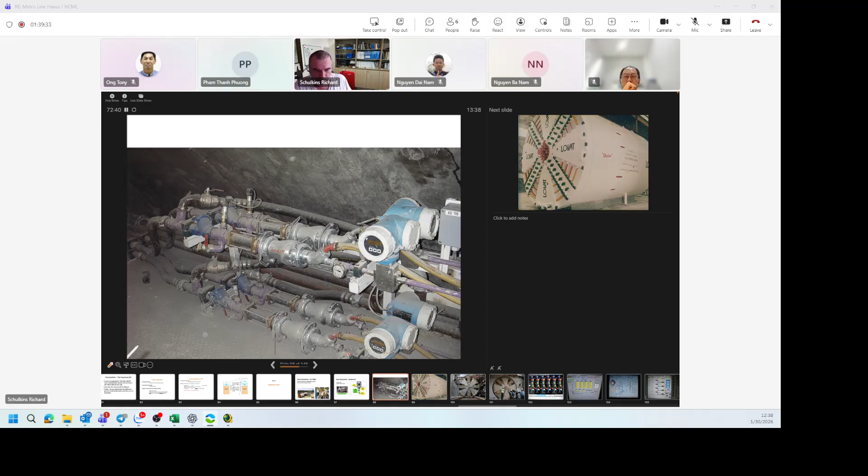Okay, I think I'm showing this.

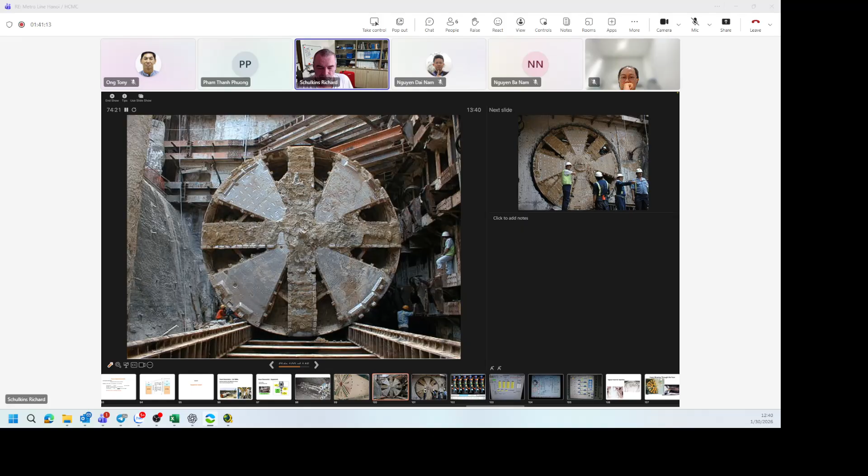I can't blame anyone else but myself, but at that particular time I was working for the contractor, so I was trying to save money. Yeah, so even back in 2000, you can see I was fat.

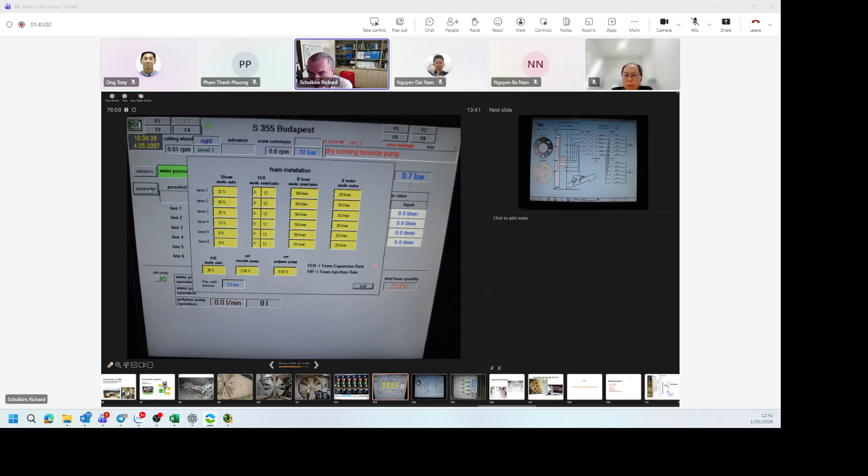Yeah, it all becomes very obvious after a day of doing it. Not so obvious as I'm trying to talk to you now, I imagine.

Different system, foam. Yeah. Sorry there. What's going on?

TBM selection, not all TBMs are the same. They have different systems for everything, so it's important to know what they've got on their particular TBM. Spoil dumping criteria - this is where we can get our environmental advantage, hopefully. Present research and guidelines - there are no particular guidelines, which makes life much easier and more complicated in many ways, but there's typically not much.

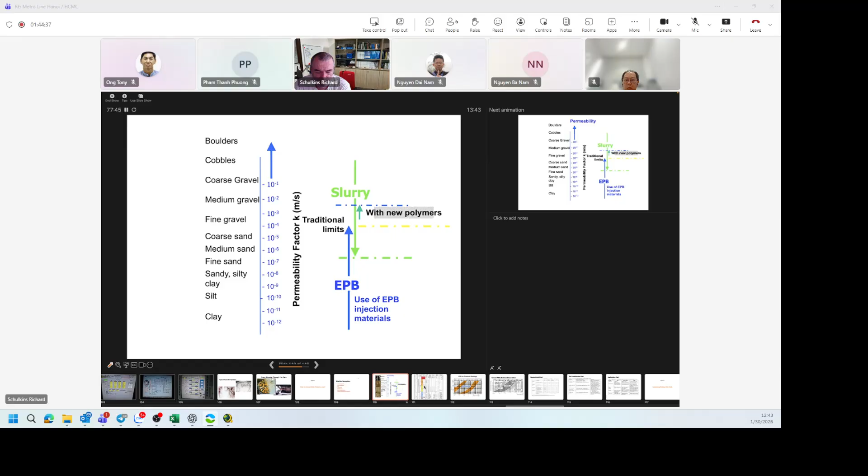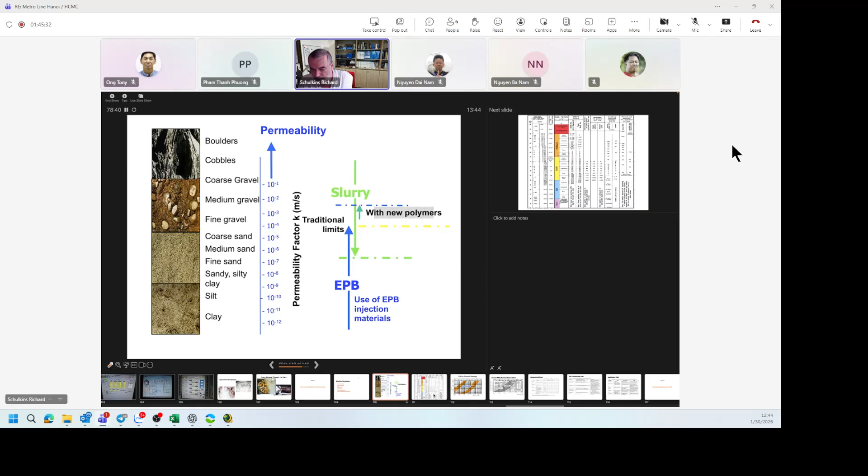This is coming back to why choose an EPB or why choose a slurry machine. Depending on the permeability of the ground - if you've got very big particles, so very high permeability, or extremely mixed ground conditions, you'll probably use a slurry machine because it will be impossible on an EPB machine to make a paste with only coarse grain material. You need 20% fine material to be able to use an EPB. So that's kind of interesting. If you're going through gravel or very loose, unconsolidated soil, then you do need a slurry machine, you don't have any choice. But everywhere else, you can use an EPB.

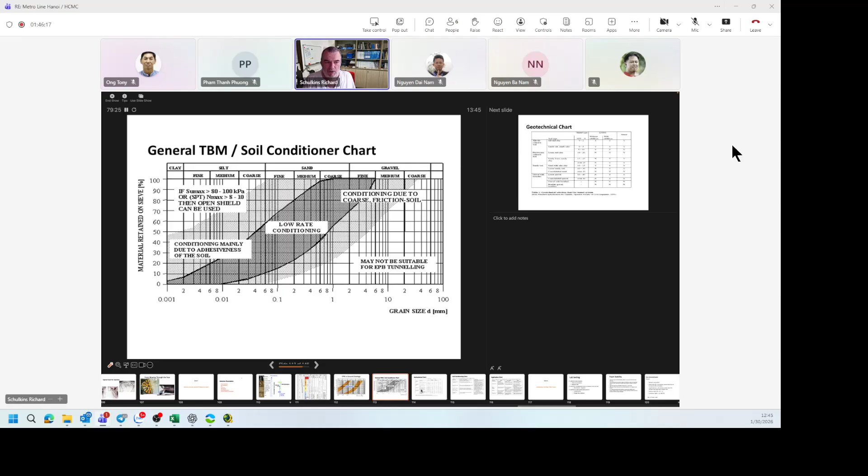I'll just put that there if you're not so clear about what fine material means. You need to have less than this amount of sand and silt. And then there's this graph, which is kind of universally accepted. If you take some soil and plot the granulometric curve on this graph, you can see what's suitable for an earth pressure balance machine. If it's outside of these bands, then you'd typically need a slurry machine. This is just the same thing with a bit more information on it.

You can read it if you want, but it's not for now. I think I've already spoken too much.

What we do in the lab: particle size distribution, Atterberg limits if we can. We often have all the information from you guys with the geotechnical investigative report, so we don't need to do that because it's already done.

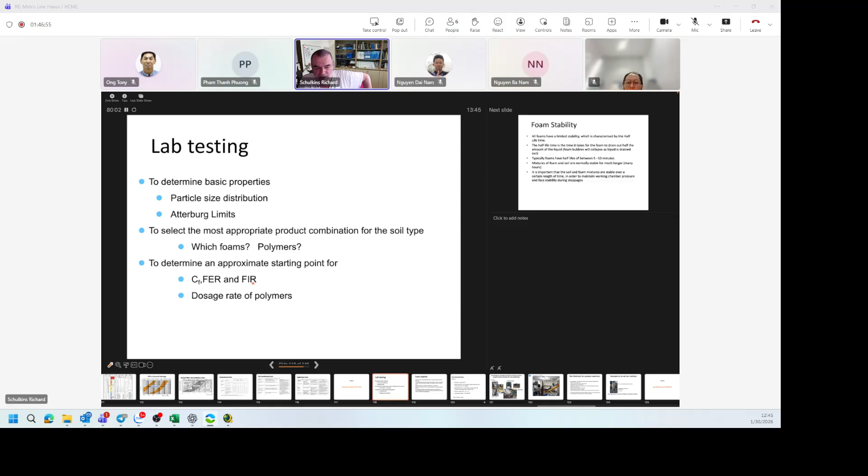So then we need a starting point for the concentration, the FER and FIR, or possible dosage rates of polymer. On the job site, we can check the stability of the foam compared to our competitors.

What we often find is that our competitors sell foam that's been diluted a lot. Their price is very, very cheap, but that's because they're selling water. The only way you can demonstrate this on a job site is to generate foam with our product and a competitor product, and you can see from that whether they've just diluted it with water or not.

What's often the case as well is that our competitors will give a fantastic foam for the trial, but then they'll supply something different. You can also check it as the project goes on, to see whether our competitors are cheating. And believe me, I've seen it with Sika a few times.

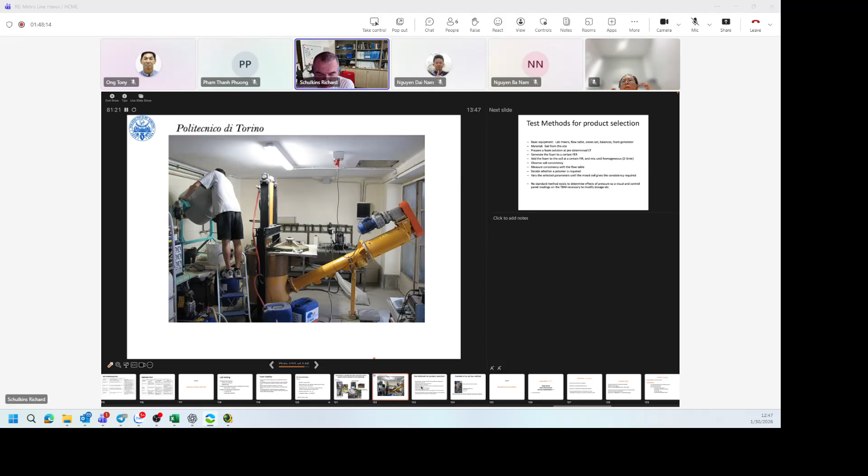Atterberg limits, some more tests we do in the lab. This is in Turin, where we sponsor the Polytechnic there, and we've got our own kind of screw conveyor and pressurized thing. But not to worry too much about that.

Certainly, if you send me the soil, I'll send you the information on what we're doing with the testing as well. This is just a permeability test, so you put soil in the bottom of a Perspex tube and you can see how long it takes to drain the water through.

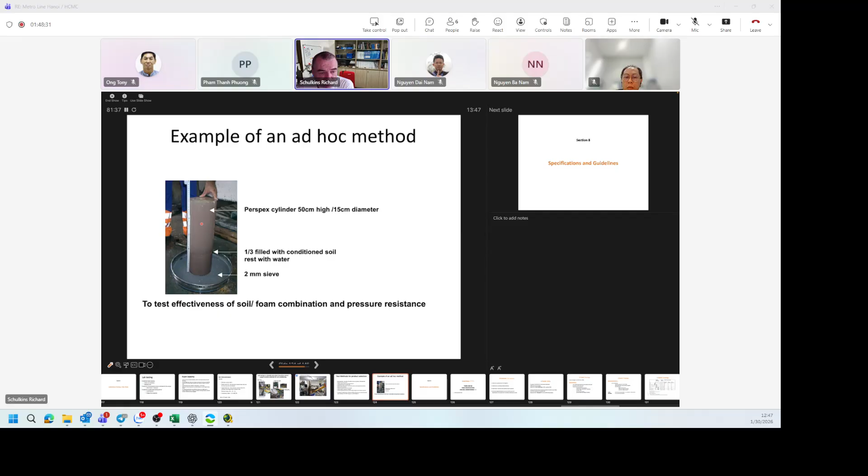Specification guidelines—there are none. Sometimes the contracts will have something, but more often than not, they don't. This is the EFNARC thing that I'm sure Mr. Ann's aware of, but it doesn't really tell you anything useful.

And I think that's going to do for today. I think you've heard too much already. You're bored of my voice.

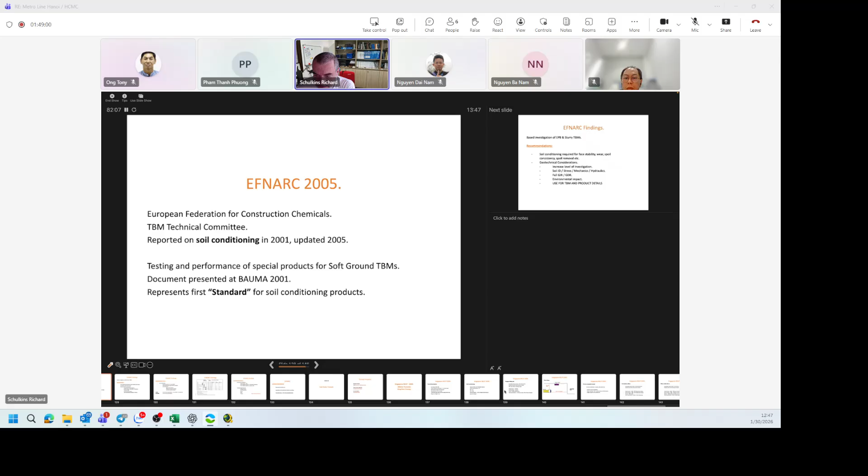So for today, I've just spoken about basically ground conditioning, and even then it's just scratching the surface, I guess. But I hope you learned something.